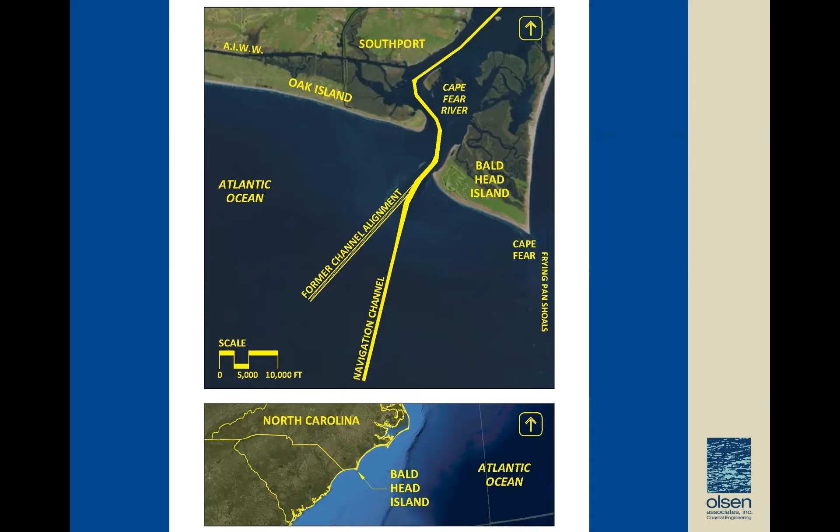Yeah, the purpose of this is, normally this is our location slide. The implication here, however, is what I would like to do is to begin to show you the location of the federal navigation project that extends from the ocean all the way up to the city of Wilmington. What's represented here is the former channel alignment that existed prior to 2000, and then the new channel alignment, which was associated also with a deepening project and a widening project in or about year 2000. And I'm going to get into the details of that in a second.

So the actual beach management activities were really initiated in the 1990s. There were two small-scale beach fill projects where sand was placed out of the navigation project on the point and in West Beach. That was done by the federal government. However, you paid for it. There was no subsidization by the Fed, and so it was done under what's called Section 206.

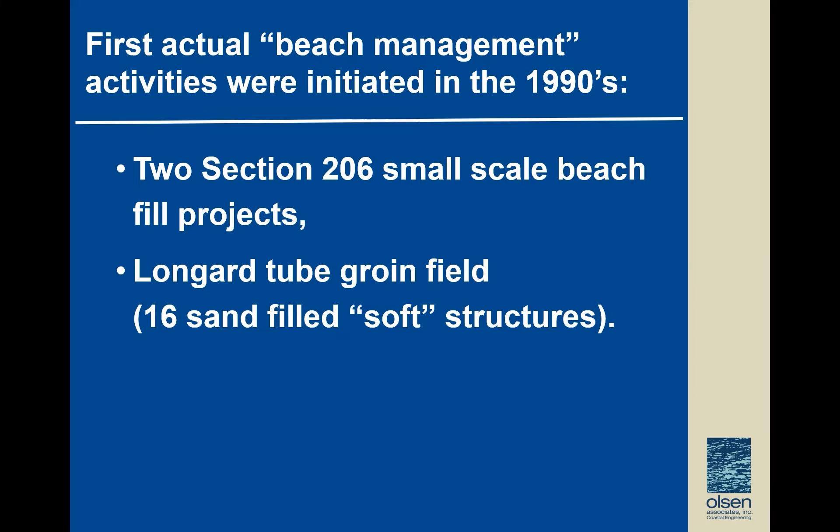Also in the 90s, the village initiated the Longard tube groin field, which is 16 sand-filled soft structures, which is very unique for the state of North Carolina and actually required specific legislation to be done. That particular project was actually well described in a small article in the Shore and Beach magazine back in 1998, which probably there should be a copy around.

That project was actually conceptually designed by us as a part of this feasibility study on beach restoration from April of '89. This study was prepared by Dr. Kevin Bodge of our office, and it was the first time that the specifics of erosion and also the specifics of the navigation project had ever been evaluated in the context of damage to Bald Head Island.

Now, a couple of key things that came out of this study is first that it actually conceptually recommended the groin field, which was not implemented by us. The village at the time hired a local engineering firm to implement it. It also analytically, through some, it was state-of-the-art modeling back then, which is pretty crude today.

It determined that on South Beach, there's a nodal point, which is interesting because that's the point where the net transport goes in two different directions. So that nodal point is about a third of the way down the beach from the point towards the east. And what it says is that from that point eastward, the net transport during the year is towards Cape Fear. And from that point westward, the net transport is towards the inlet.

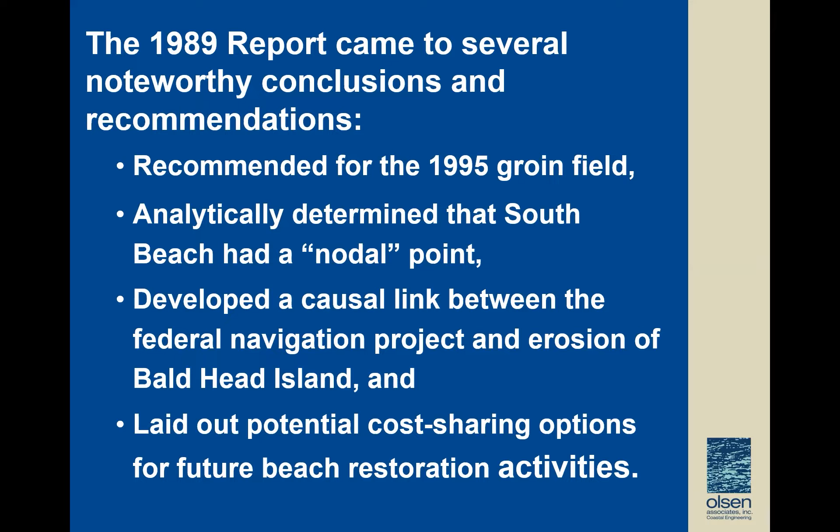The other important thing that was initiated in about 2000 was a very detailed monitoring program that measures the beach twice a year, both the East Beach, South Beach, and West Beach, with the intent of determining over time the performance of sand that's placed on the island, but also to assist in the development of the long-term causal links between the navigation project and beach erosion on the island.

And this is probably one of the most important things that the village did back in 2000, because we've relied on the results of this monitoring program for many years in many of the requests that have been made to the federal government.

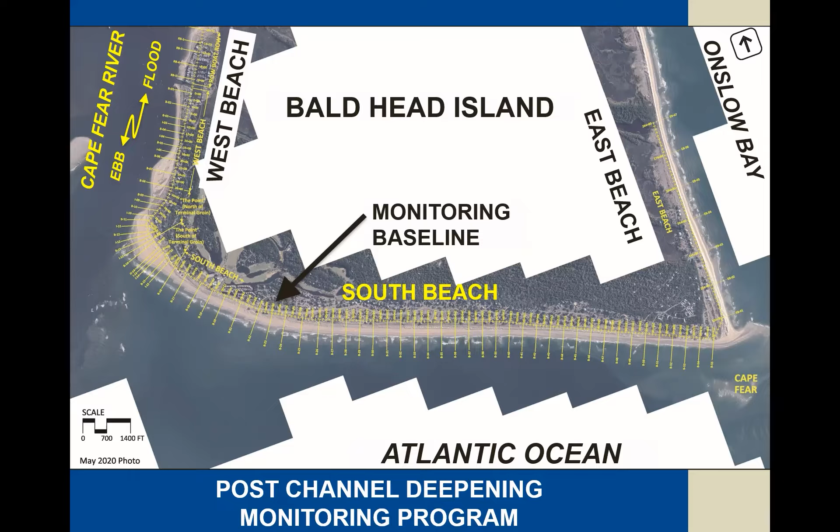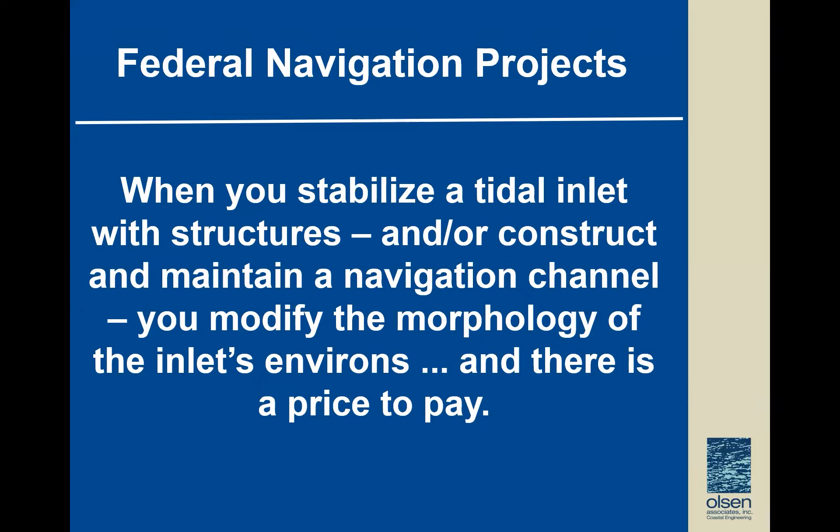Now, what you need to understand is that when you stabilize a tidal inlet, either with structures, and you don't have to have structures, or you construct a navigation channel and you keep that channel at one location, by virtue of dredging it to maintain its authorized navigable depth, you modify the morphology of the inlet's environs, and there's always a price to pay. And it doesn't matter if you're talking about the Cape Fear River, the Savannah River, Jacksonville Harbor, Charleston, the results are always the same.

The arrows you're looking at here are net flow arrows or vectors computed by numerical modeling. But the important thing to realize or to see in the comparison is the loss of sand over time, which is reflected by the light yellow and orange colors. And so in the slide on the left, you see what's called a sand sharing system that naturally existed across the inlet, from Bald Head Island to Oak Island.

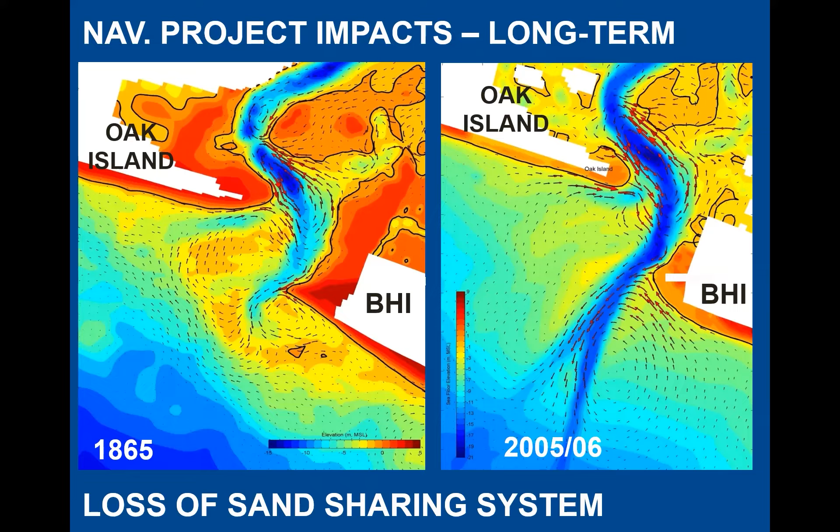And you can see on the right that that system not only is bifurcated by the channel, but it's been affected. You don't have to be a coastal engineer to qualitatively see the differences in the amount of sand that's in that system. Now, as coastal engineers, what we can do is we can take historical bathymetric charts and we map differences in them, and we can begin to quantify what these volumes of change are.

And simplistically, what you see here is that there's sort of a loser and a winner in the post-navigation project environment. Oak Island gained a lot of sand over time. Bald Head Island lost a lot of sand, particularly within Bald Head Shoal. Another important element of this is the loss of sand out of the sand sharing system vis-a-vis dredging. And so that's reflected by the red 24.2 million cubic yards, which were taken out of the sand sharing system only between 1976 and 95.

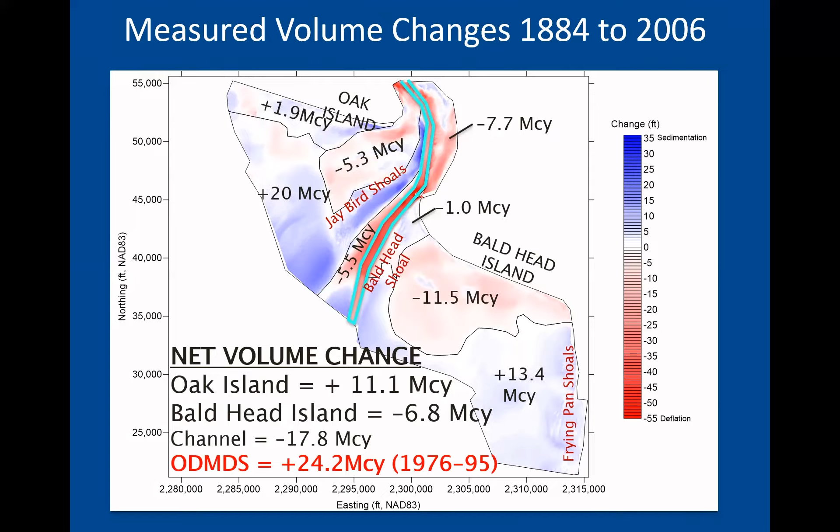That sand was taken to an offshore location, which is called the ODMDS, which is an offshore disposal area, because that was the cheapest way to effect the maintenance of the project. That is to say, they didn't put the sand back on the beaches like they do today. Before 2000, the Corps took all this sand and just dumped it offshore with hopper dredges. And the implication of that is that every year they did that, they would take some volume of sand out of the sand sharing system to the point that the system looked something like this.

Another thing that the Corps did back when they were developing the navigation project is that they closed off New Inlet. They did that so that all tidal influence would be through the mouth of the Cape Fear River that existed between Smith Island and Oak Island. So instead of water coming in both New Inlet and at this location, they closed this off so that all flow would enter and exit between the two barrier islands.

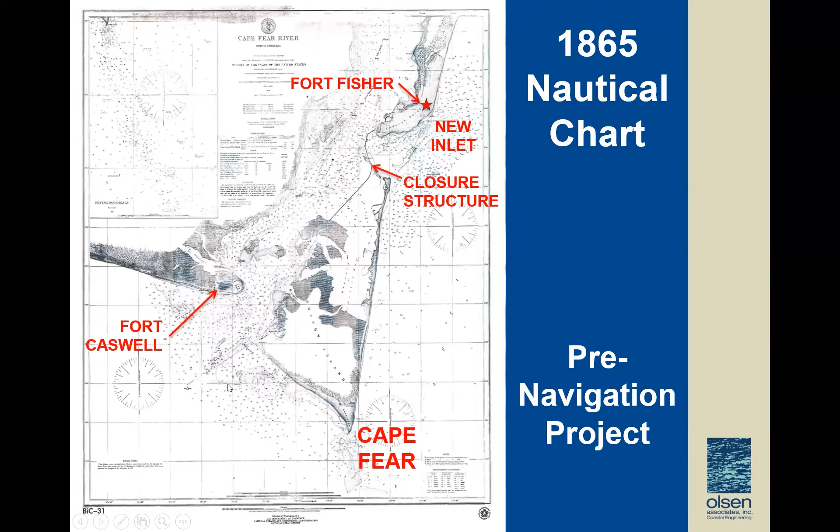Now in 2000, the Corps adopted a new standard. Basically, to some degree, we call it regional sediment management. They were dragged into that on the basis of information that was provided to them through one or more white papers that we developed on behalf of the Village of Bald Head Island, submitted to the federal government, that recognized and codified the long-term impacts of that navigation project, as well as the potential impacts of the harbor deepening project and the continued removal of sand from the system.

So in or about 2000, the Corps of Engineers, vis-a-vis the Wilmington District, developed a new philosophy, which we appreciate. This particular slide sums up part of that. It basically says if you take a cubic yard of littoral sand out of a tidal entrance or an inlet, and you take it out of the littoral zone, it's going to cause a cubic yard of erosion somewhere within the system, particularly, in our case, on one of the two barrier islands.

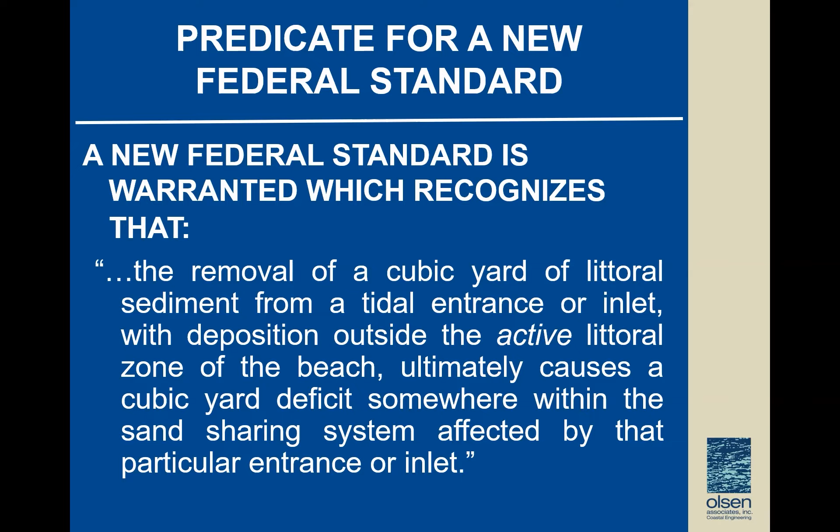And again, you didn't have to be a coastal engineer to recognize the physical impact of the new channel alignment, which is under construction here. This is Becky, who was a village manager at the time. Literally, you could hit the dredge probably with a silver dollar if you had a decent arm. But this particular dredge is constructing the new alignment and the new width in 2000 associated with the federally authorized deepening project.

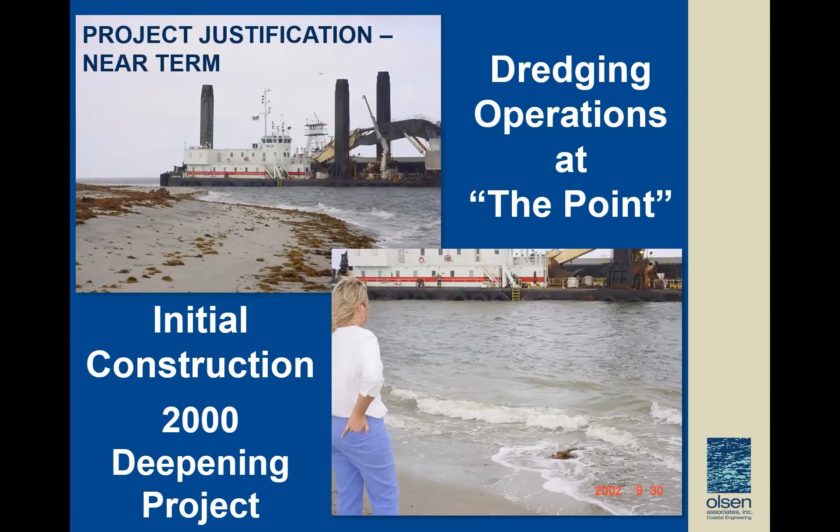Again, part of the information that we shared with the Corps on behalf of the village tried to quantify the physical impacts of the navigation project on the island. And so in this particular case, the bottom of the federal project is defined as the area between the two red lines. That's the alignment of the project. And what you see here is shoaling of sand off of the point.

Well, the Corps calls this shoaling. We call it the toe of the island. And so you can see that between dredging events, there's always a conflict here, whereby sand comes off of Bald Head Island and fills in the navigation project because that's what nature wants to do.

The Corps episodically comes and dredges that material out, historically took it out of the system, but now vis-a-vis the Wilmington Harbor Sand Management Plan, which the village played an intimate role in getting the district to incorporate into their project, that sand now goes back either to Oak Island or it goes back to Bald Head Island.

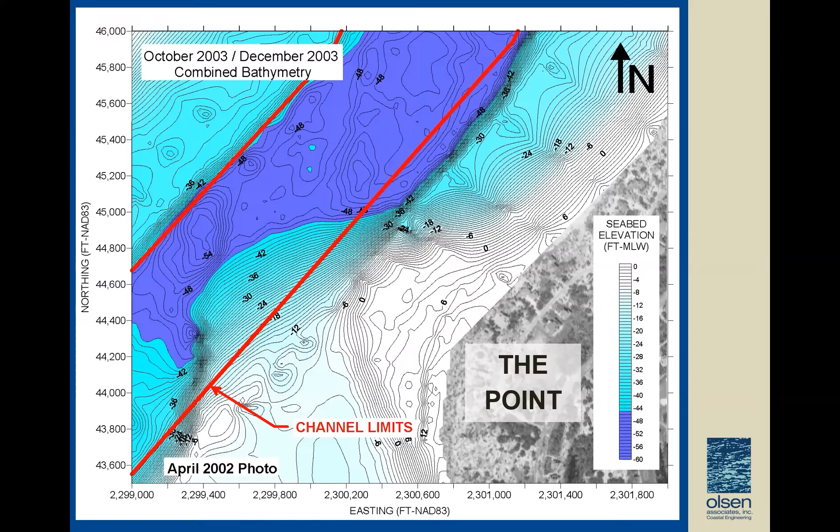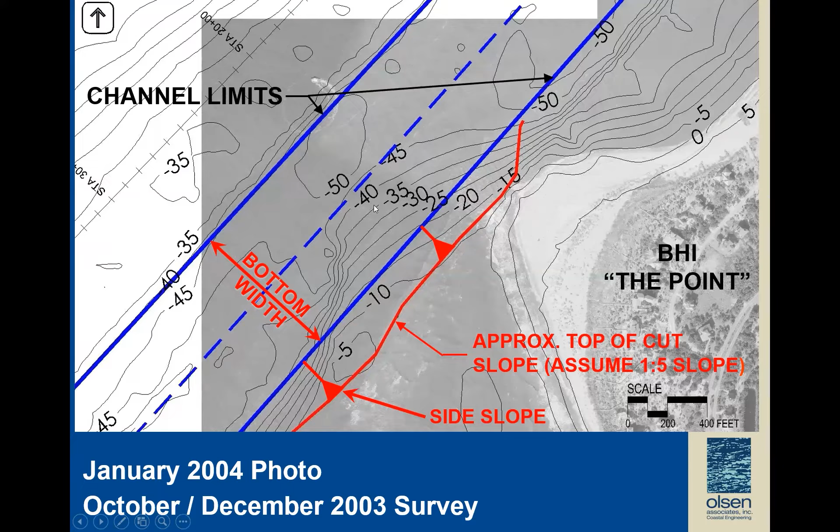And again, when we talk about the conflict between the two, we're not talking about just the bottom width. We also have the side slopes to account for. So in this particular case, if you look at the side slopes of that navigation project, they physically intercept almost the mean high water line at the point. And again, the Corps is required to come dredge this channel every 2 to 3 years in order to keep it navigable. And so there is a continuing impact, there's a continuing movement of littoral sand.

So over time, the village developed a shore stabilization strategy that's best viewed as a three-legged stool. So in this particular case, as I mentioned, both Oak Island and the village of Bald Head Island now receive sand from the Wilmington Harbor Sand Management Plan. That is to say, the plan that was adopted proposed to put 2/3 of the sand on Bald Head Island and about 1/3 more or less on Oak Island.

And the way they did this is that Bald Head would get 2 disposal events to 1 disposal event on Oak Island. And that had ramifications because there would be a period of time when Bald Head Island would not get sand. And because of that, Bald Head Island was required to develop and to construct their own renourishment projects when sand was going to Oak Island.

The third leg of the stool is a function of the structures that are required to improve the performance of sand that is placed on Bald Head Island, and in particular on South Beach episodically. So this is an example of the federal disposal project that was constructed a year ago, literally a year ago. And you can see here that through the cooperation of the district, they now are placing the sand in the guise of pretty much a fill berm that would be akin to performing beach restoration.

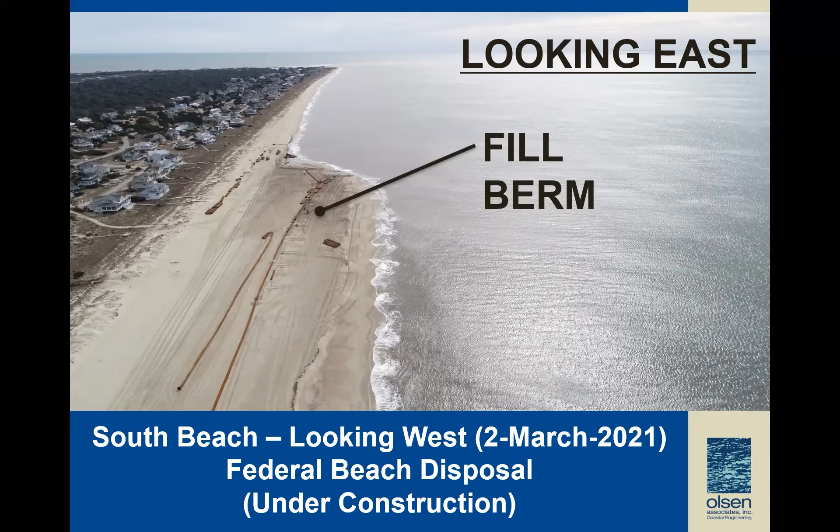But again, this is what it looks like in the fill process that's ongoing here as you're looking east. This is what it looks like when you're looking west. You can see the discharge coming out of the 30-inch steel pipe. You can see the dredge in the background, dredging the channel back to its original authorized dimensions.

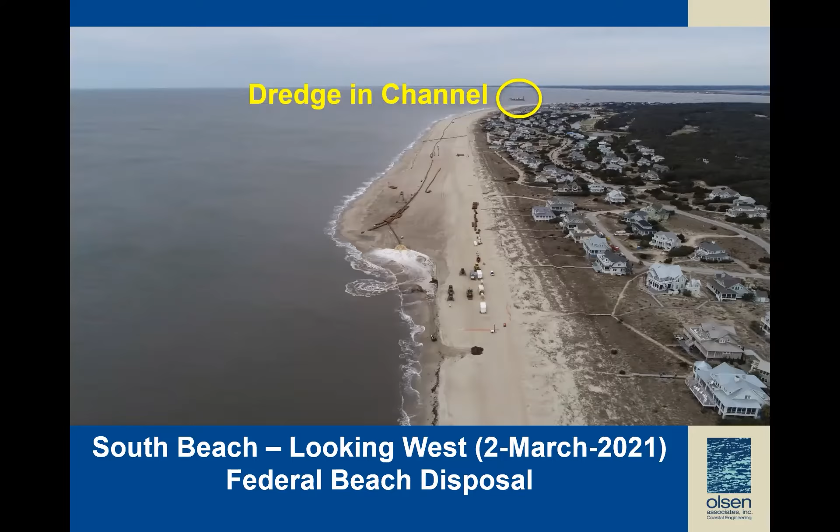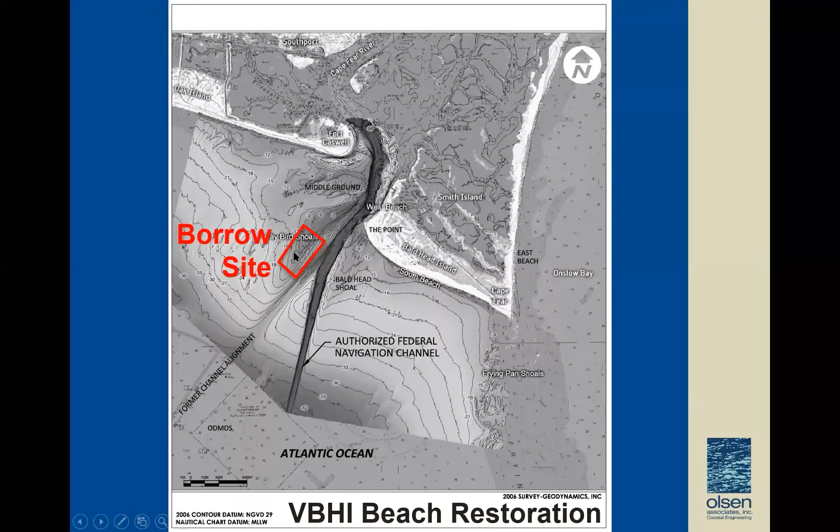Well, as I mentioned, in the off years, in order to not have dramatic setbacks in the configuration of the beach on South Beach and the dunes, the village was required to perform beach restoration funded solely by the village. The first major project that was constructed utilized sand that came out of a borrow site located on the very distal end of Jaybird Shoals. And that area looks something like this.

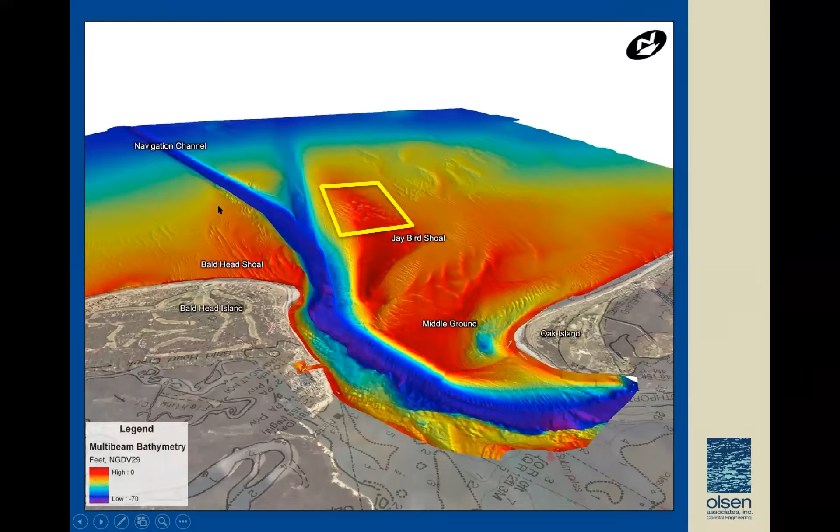And again, you can see here the old channel alignment, and you can see the new channel alignment. Notice again that this channel alignment, unfortunately, was directed through Bald Head Shoal, and there are implications associated with that. We're currently in the process of trying to develop a second major borrow site located somewhere in this box, actually in closer proximity to the island. And I'll talk about that at the end of my presentation.

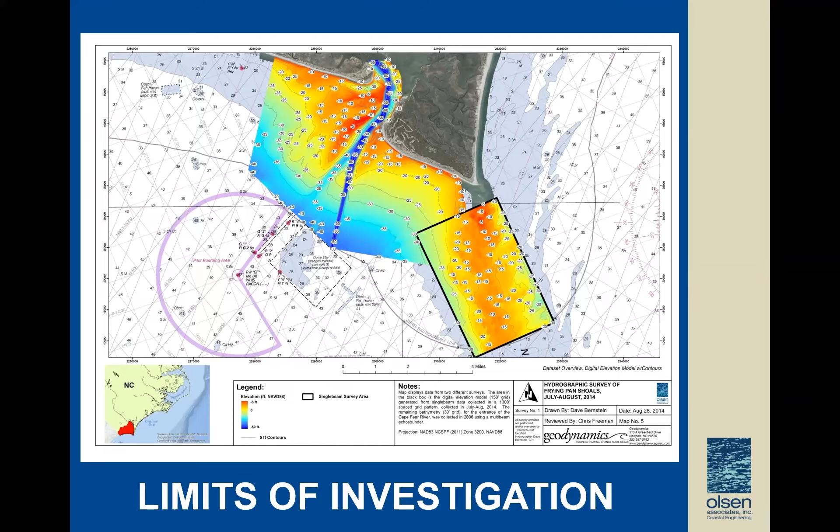And again, over time, the sand diminishes. At the same time, we also rebuilt the sand tube groin fields in an improved version. We moved some of the groins. We used better product than was originally used. And the purpose of that was to reduce or minimize the sand losses over time, particularly in the immediate vicinity of the navigation project, where the inlet impacts are the greatest.

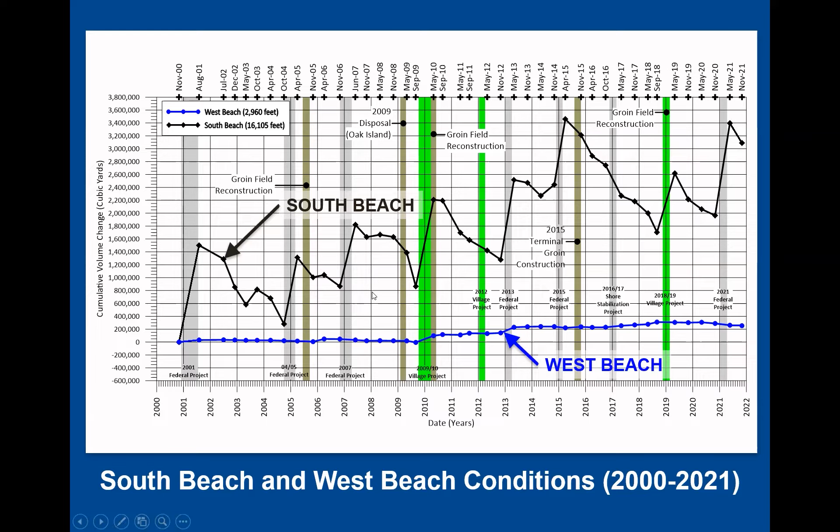So the inclination of this particular graph, as I'll get into in just a second, because it slopes upward, intimates very emphatically the success of your beach restoration project. That is to say that at least at this point in time, there is 3 million cubic yards of sand in your beach system, your dune system, that did not exist in 2000. So that trend line is indicative of a successful beach restoration project.

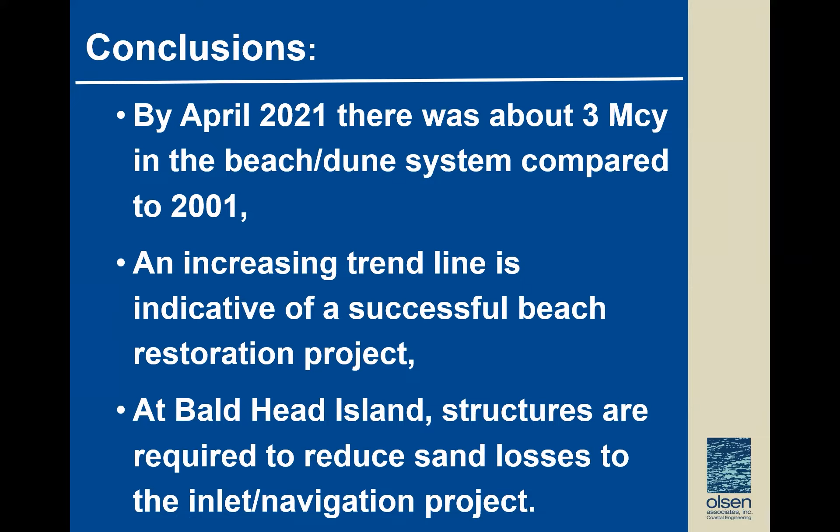In this particular case, your beach restoration project is a function of sand placed by the government and also by you. And again, we can see when we read the data that structures are required to reduce the sand losses and to maximize the performance over time of this beach fill project. And just as an example to show you the nature of the improvement of the beach profile, this is a section of the beach out of our monitoring program at one particular station, which we just picked here.

So the beach profile in 2000 is represented by the black line. The beach profile in 2018 is represented by the purple line. You can see here that there actually is a dune in 2018 that did not exist in 2000. Dune is what goes up to elevation 16, 17. And you can see that there's a significant difference between these two lines. It intimates the height of the sand that was in place in 2018 relative to the beach profile in 2000.

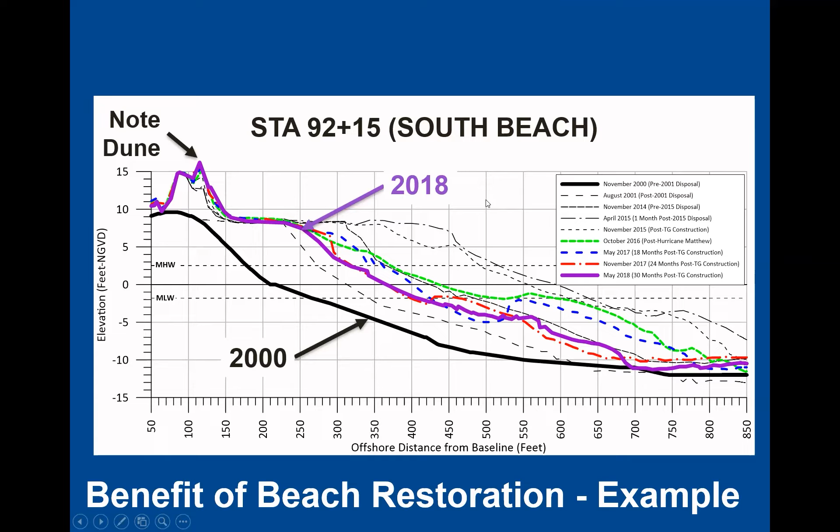So if you go to, let's say, the intertidal beach between mean high water and mean low water, and you stand there today, in year 2000 there was 14 feet less sand vertically there than there was in 2018. So what we've done is we've pushed the profile out over time. We've maintained a beach width and a beach berm that didn't exist in 2000. And throughout much of the island today, we have a pretty robust dune system. All of that is a function of that 3 million cubic yards that exists there today. But even over time, it's been an ever increasing volume.

So the third leg of the stool is the use of structures to reduce sand losses, particularly in the proximity of the navigation project and the river itself. And as we indicated, we've had a sand tube groin field that's been there since the mid-90s. We've replaced that groin field at least twice because these sand tubes basically wear out. That is to say, the gradual erosion and abrasion of these tubes due to the natural forces of the waves and the sand movement literally wear the fabric out, because they are only constructed of fabric.

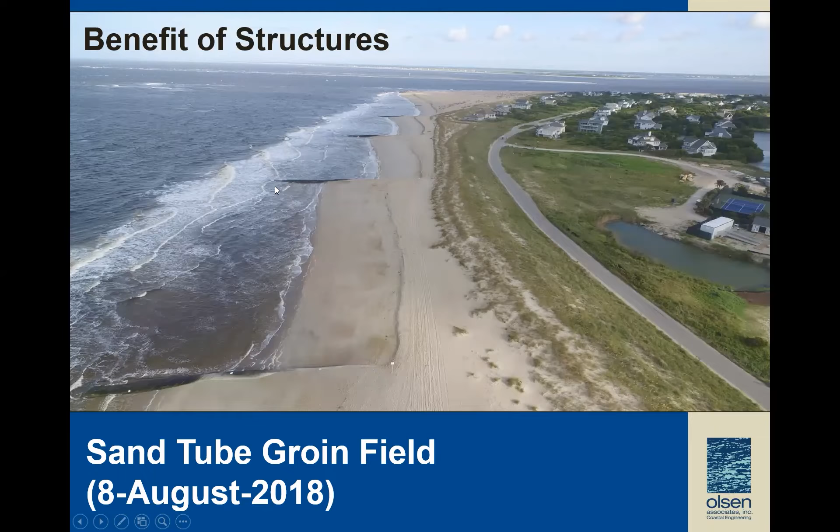Again, another view looking backwards. But what I can tell you is that if these tubes were not there, this particular shoreline would be back to the road. It would be under these buildings. And we know that because there have been periods of time, particularly before we rebuilt this groin field, when that exactly was the occasion. Matter of fact, we did have storms that impacted the road.

Of course, at this point in time, we now only have a beach that we're maintaining out here, but we have a fairly robust dune system. Now, these particular sand tubes are unique in that the only way that we can construct them is in the dry. And so every time we have rebuilt them, we've rebuilt them concurrent with a beach restoration or a beach disposal project whereby we could go in, we could excavate the beach, we could take out the old groin, we could put in the new groin, and then we could backfill it.

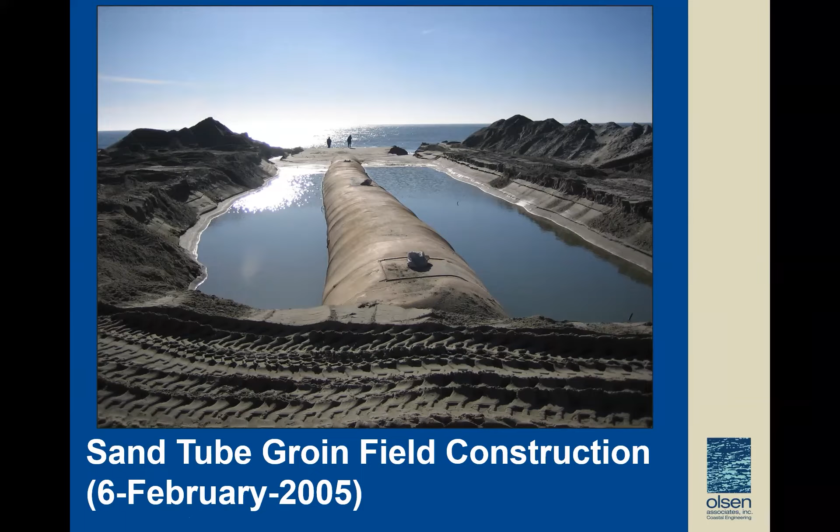So that is to say that we really couldn't build these groins out into the sea successfully. So we build them in the land, and then we allow the beach to equilibrate or erode around it. Now, even though the sand tubes were successful in protecting those properties, and you can see transparently here the location of those tubes, there was always a point in time where either the fill placed by the federal government or the fill placed by the village, particularly in areas like this, would last only about 1 to 2 years before the shoreline receded back to the sand tube structures.

So what this argued for was the construction of a terminal groin, as indicated here, at the end of the island to better stabilize this particular area and to allow for the implementation of something that would function as a template for the sand that was placed there. And again, would better reduce sand losses to the inlet.

So in about, I think it was 2013 or 2014, the state of North Carolina passed a law, modified legislation that said that, okay, there could be a couple terminal groins in the state of North Carolina. The first one built was built by the village of Bald Head Island. The second one is under construction today, some 7 or 8 years later. So for a long period of time, this was the only terminal groin that was successfully constructed.

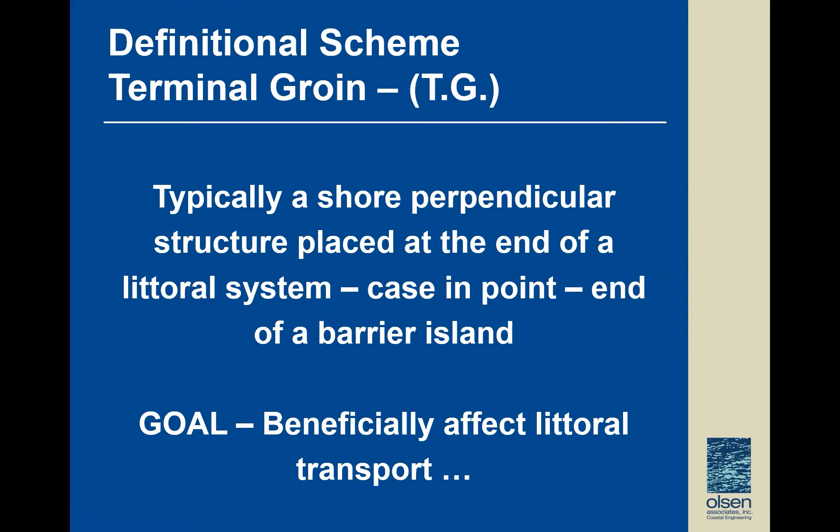Now, terminal groin, again, as I tried to indicate, it's basically a perpendicular structure placed at the end of a littoral system. The end of our littoral system, of course, is the end of our barrier island. In this particular case, that section of the island immediately adjacent to the Cape Fear River and the navigation project. And again, the goal here is to beneficially affect littoral transport.

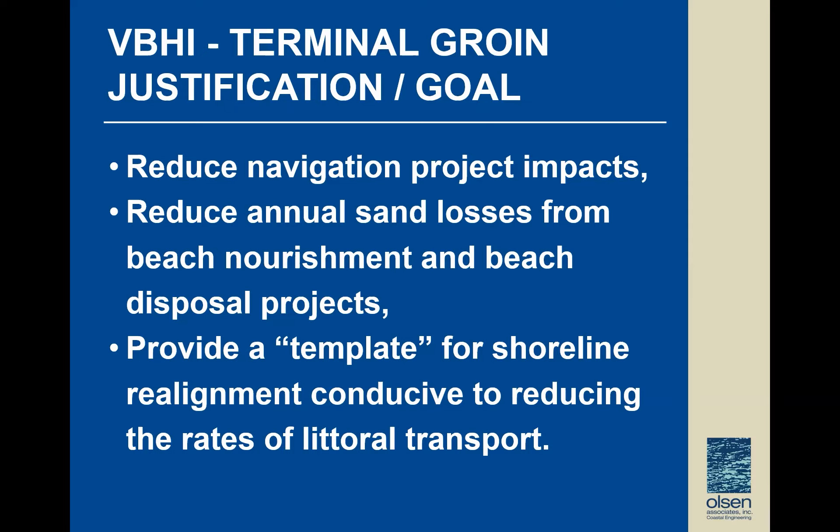At the same time, of course, we want to reduce the navigation project impacts, which are implied as greater sand losses from the beach that would occur under normal processes. And again, to provide some template for a realignment of the shoreline at that location, so that again, we can reduce the rates of littoral transport. Littoral transport being the amount of sand that's moved, let's say, annually down the shoreline.

So in leading up to the implementation of this, several years of modeling were performed, in addition to a year or two of actual permitting on the basis of that modeling. And what we found for purposes of justifying a terminal groin at this location was that we could indeed reduce the littoral transport rate in theory from about 440,000 cubic yards per year down to about 164,000 cubic yards per year.

This type of modeling and these results resulted in the lack of opposition by the Audubon Society and other environmental resource agencies who were adamantly against terminal groins at the time. They realized that the condition that the village of Bald Head Island had was different than other barrier islands, and that we could well substantiate it and had substantiated the impact of the navigation project on Bald Head Island.

And we could also prove through numerical modeling that the construction of a terminal groin did not impact anybody, which, however, we had to prove again through the use of the numerical model, and that particular structure could be endorsed or certainly not opposed by the resource agencies. And so for a long period of time, this was the only terminal groin project that was permitted in the state.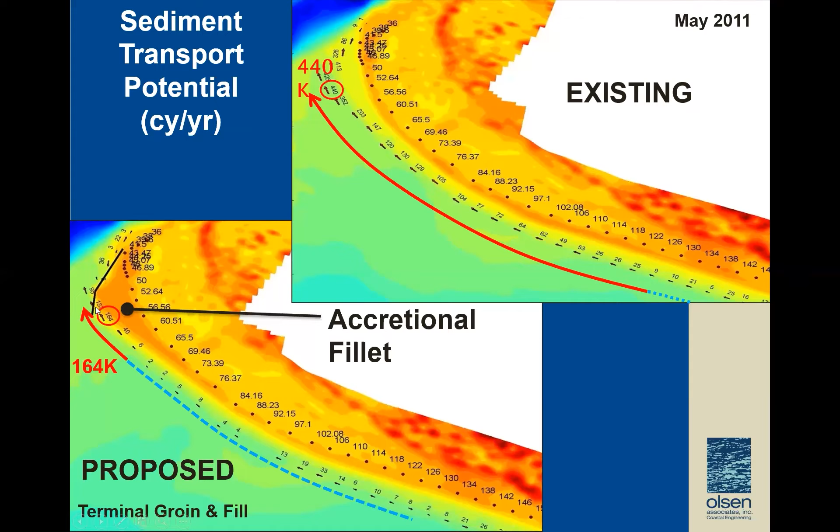And we have now pushed the shoreline away from this chronic area of erosion, and we're keeping the shoreline out in this location. Now, I will tell you that the modeling here and the original permits for the project looked at the permitting of a terminal groin which was 1,900 feet long. We did not, however, construct a 1,900-foot long structure. We constructed a terminal groin to a total length of 1,300 feet. We have the ability through the permit to extend that if we need to in the future.

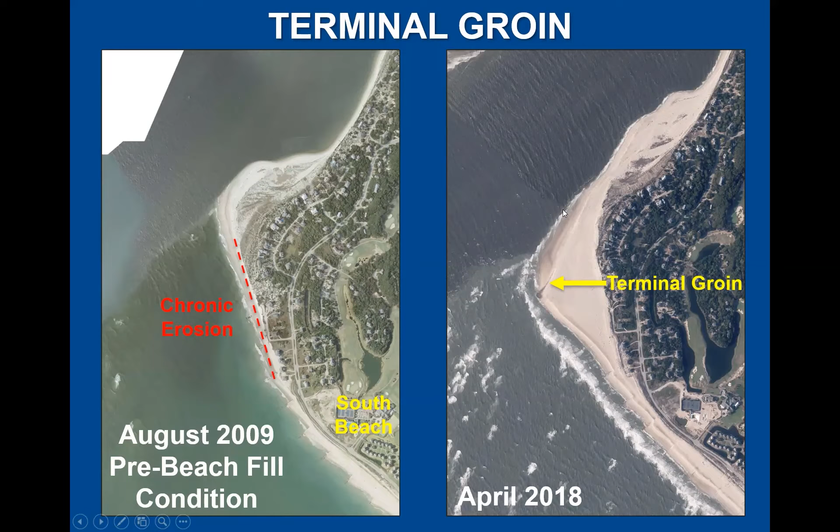But even though the modeling showed that there'd be significant benefit to South Beach through a 1,900-foot long groin, we felt that there would be adverse impacts to West Beach. That is to say that the terminal groin at 1,900 feet would be too successful. It would actually reduce the amount of sand that gets to West Beach. And by doing so, we would solve one erosion problem at the sake of another. So we'd shoot ourselves in the foot. So what was constructed originally was a 1,300-foot long structure, which is what you see located here.

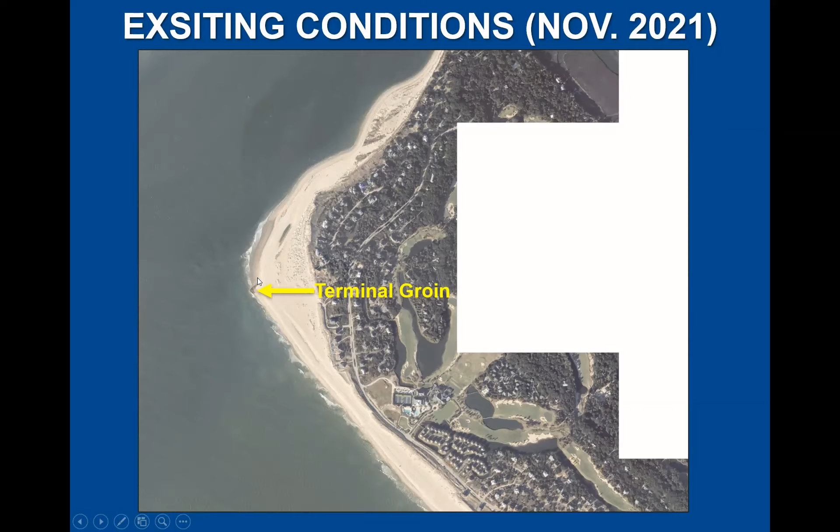And again, in November of last year, this is the condition after the last federal beach fill project. And again, the terminal groin is highly successful. And as you see here, sand does go across this groin by design. It goes around it and it goes across it.

And just again, for your own edification, the way that we built this structure is we built it in the dry, predominantly anyhow. The end of the structure was here. We were able to build probably about 1,100 feet of this structure literally in the beach disposal project that had been constructed months before we initiated this contract. This allowed for a very cost-effective terminal groin construction. Matter of fact, it was on the order of magnitude of 4.5 million dollars.

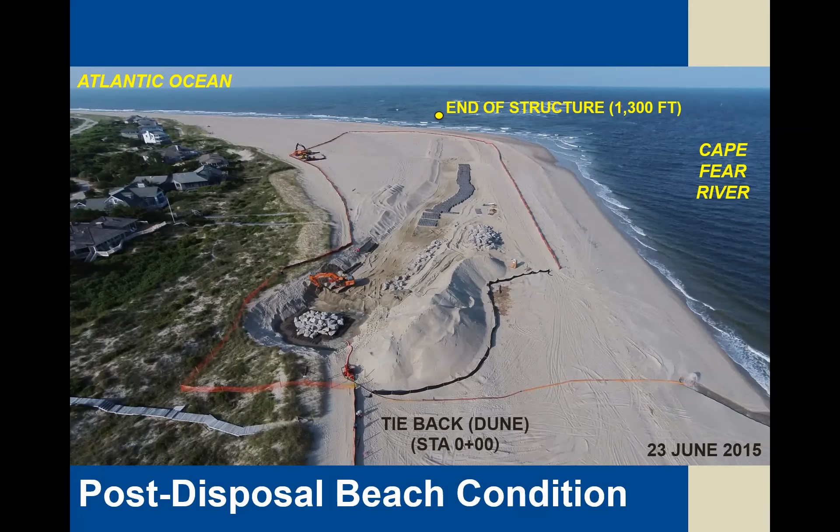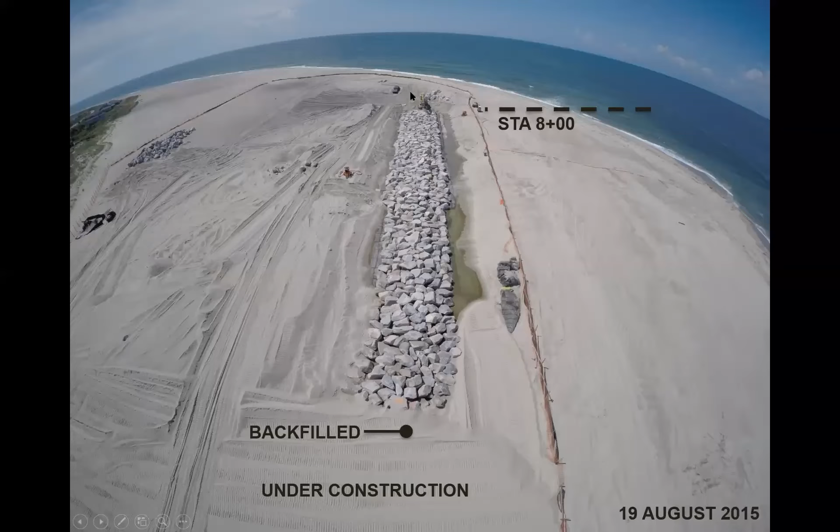If we had elected to do this in the wet, when the island had eroded back to the terminal groin field, it would have been a multiple of that. And I'm not sure that it would have even been as feasible to construct it as it was in the dry. And again, this shows you that we built it, we then backfilled it to the point that it's transparent, except at the distal end out here where it's exposed by storm waves every once in a while. And again, this is what we call a permeable groin, in that it is designed to allow sand to go over it during storm events and through it, in order to not starve the downdrift shoreline.

Well, I'm going to leave South Beach for a few minutes and talk about another important sand manipulation program that has been implemented over time by the village. And it has to do with sand bypassing at the entrance to the Marina Channel. And it's pretty obvious that this is a necessary program because we have sand that moves down West Beach naturally. The net transport of sand on West Beach is from south to north.

So sand does enter into the navigation project, and it has since the earliest implementation of the marina. And up until a few years ago, before the village took over responsibility for the entrance channel, the developer literally kept a small dredge in the marina. That small dredge would go out every month and dredge the entrance to the channel.

Now in 2015, it was decided that the village should take over the maintenance, and several things happened at that time. One, we extended the original structures that had been constructed by the developer early in the 70s or 80s. We extended those structures out, we hooked them, we added rock so that it would be better. We would have less shoaling of the channel itself over time.

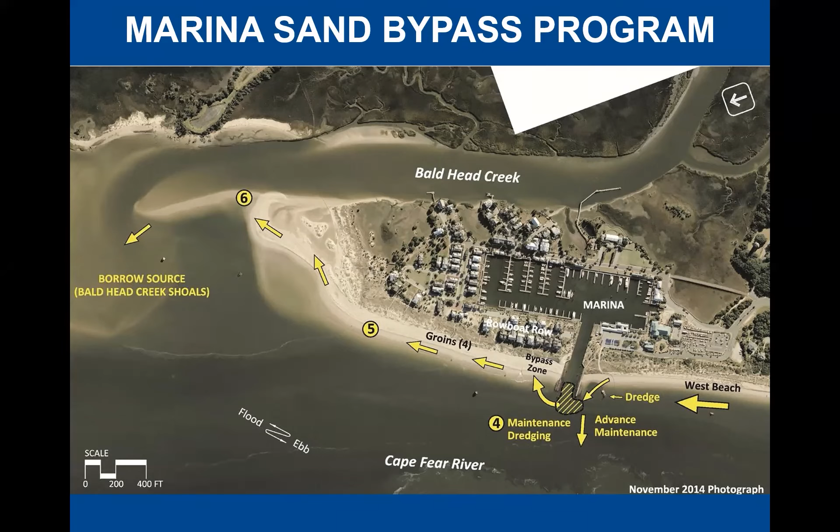Now, all of the sand that is taken out of here has been moved to the other side, or to the north side of the entrance, as a bypass program in order to feed the beach that existed up here seaward of Rowboat Row. Now, we did find over time that even with the extension of the jetties that you see here, we still had exacerbated sand losses in this vicinity.

Part of that was natural through waves that would affect this area from the southeast. The other part was man-induced, and that was basically the ferry system. As you ride the ferry in each day, or particularly coming in, you'll notice that the ferry has to come in at a pretty high rate of speed. And the reason is that there's cross currents out here. So in order to maintain stability and the direction of the ferry, he's got to come in at a high rate of speed. And then as soon as he gets within the confines of the entrance to the Marina Channel, he slows down.

Well, as he comes in at a high rate of speed, he always introduces some small wave field caused by the water that is pushed by the ferry. And what we identified is that part of the erosion that we had in this location was ferry induced. So we constructed two T-head structures, or actually two breakwaters. We wanted them to be T-head structures, but the state wouldn't allow us to do it, which were placed in this area to stabilize and to keep part of the sand that is bypassed here in a condition whereby we would have a protected beach.

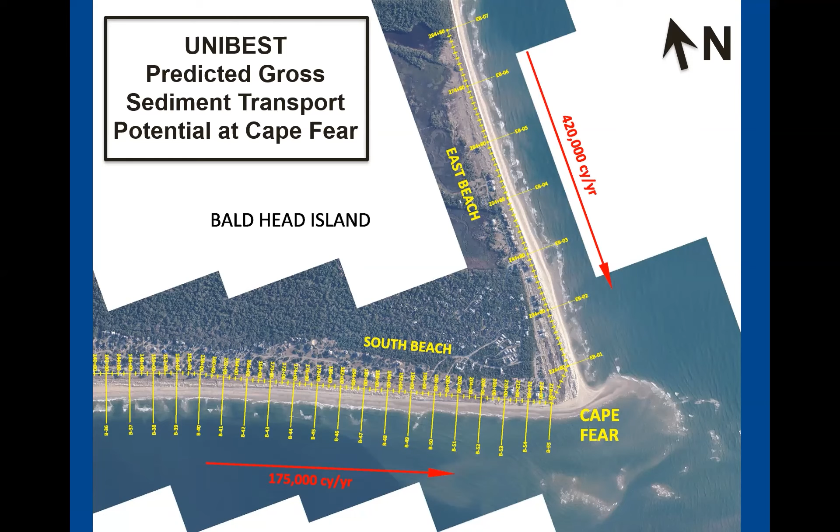Switching back to South Beach and to the east end of South Beach, obviously it's well acknowledged that we have issues with the condition of Cape Fear. That is to say, Cape Fear itself is a depositional area that feeds Frying Pan Shoals. It is fed by sand that comes from the north and sand that comes from the west along South Beach. And it's pretty well documented that Cape Fear is the tail that wags the dog. That is to say that the configuration of Cape Fear at one point in time affects the stability of these two shorelines. And unfortunately, in this particular case, it affects the immediate stability of the beach in front of the Shoals Club.

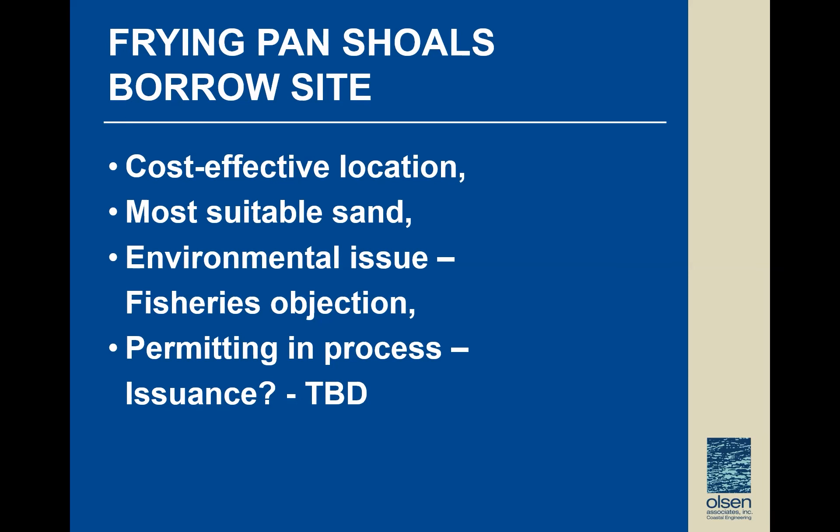And you will soon be considering a fisheries monitoring plan, proposed by LMG, who is participating in the permitting process, to do certain fisheries monitoring on the shoal formation out there to try to break our permit loose. Because our permit is in the process right now where there are objections, and we need to prove and to codify the points that we have made that there really will not be any fisheries impacts associated with that borrow site.

Now, other theoretical considerations by the Village Council, and these have been tossed around for a long time. One consideration that's been proposed is to convert the sand tube groins to rock structures. The reason being is we've been replacing the sand tube groins basically on a 5-year interval. And so there's a cost of doing that. Nominally, the last cost was about 1 million. So one rhetorical question is, well, why don't we make those permanent structures so we don't have to episodically replace them? Well, that's very difficult in the state of North Carolina. And at this point in time, it's probably not feasible permit-wise. It would take, again, probably some modifications or legislation having to do with those structures.

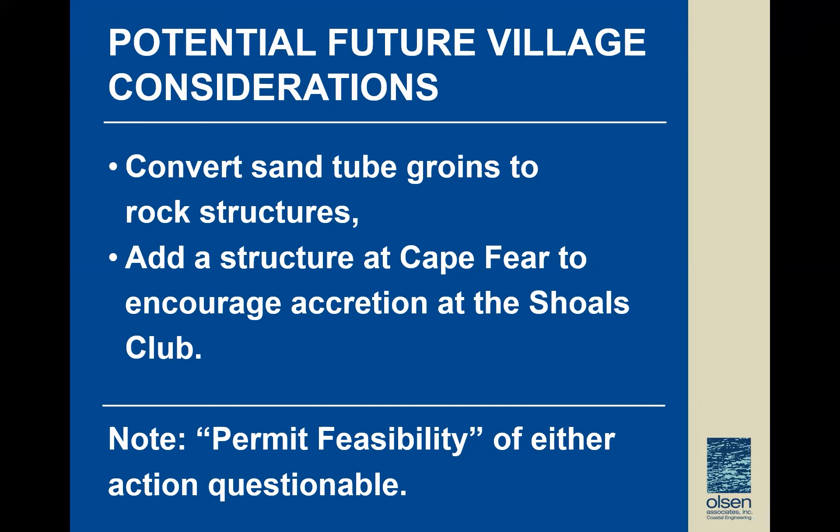The other rhetorical question is, well, why don't we build a terminal structure at Cape Fear to solve the Shoals Club problem there, due to the breaking away of Frying Pan Shoals from the shoreline. So again, these are questions on the table. They probably will be legislatively and regulatorily discussed, at least in the near future, but the actual feasibility of permitting either one of these is quite questionable.

Questions? Eric, thanks so much. That was very informative. I appreciate it. Thank you, Eric. Go ahead.